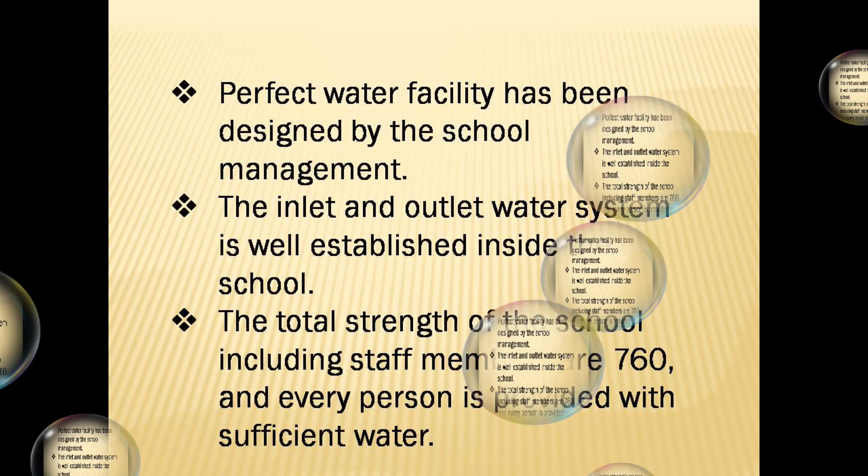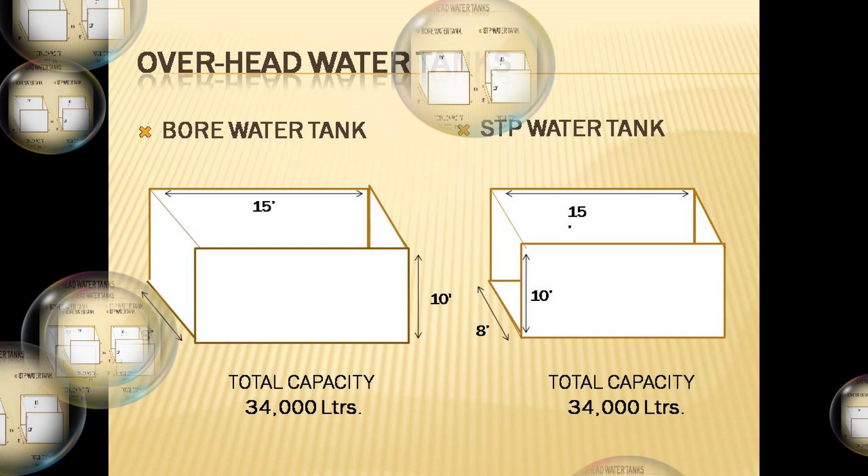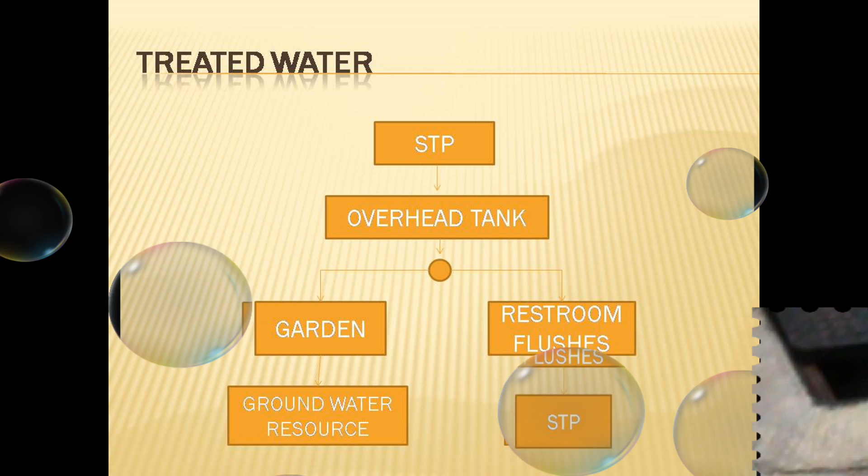We have a well-planned inlet water system in our school. The storage facilities available are a borewell sump that stores 1 lakh liters of water every day. The water is then pumped to the overhead tank. From there, it is distributed to the taps in restrooms and the reverse osmosis plant for drinking purpose. The wastewater from the restrooms is carried to the sewage treatment plant for recycling. The treated water from STP is used in restroom flushes and for watering the garden.

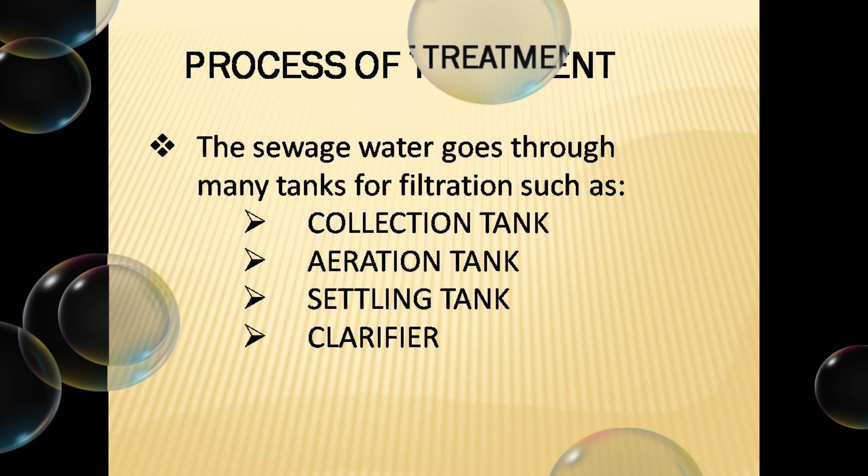Our school VME has an exclusive sewage treatment plant set up to recycle the wastewater. The recycled water is used in the gardens and in the toilets. The water takes about 8 hours to get recycled. The sewage water goes to the collection tank, aeration tank, settling tank and the clarifier. The water used in the school is collected in the collection tank. No filtration process takes place here.

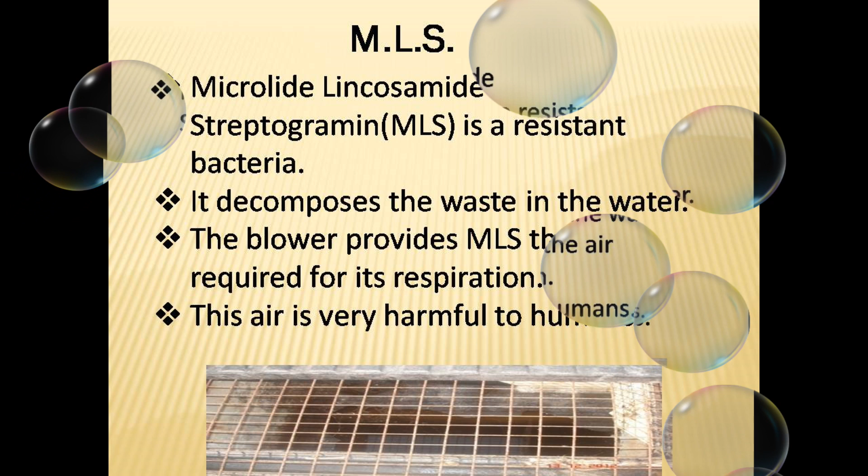This water is then pumped into the aeration tank where urea, diammonium phosphate, and cow dung are mixed together to stimulate the formation of microlide lincosamide streptogramin bacteria, which is a resistant bacteria that helps in the decomposition of waste in the water. The blower in the aeration tank provides the MLS the air required for its respiration. The air is most important for MLS and is very harmful to humans.

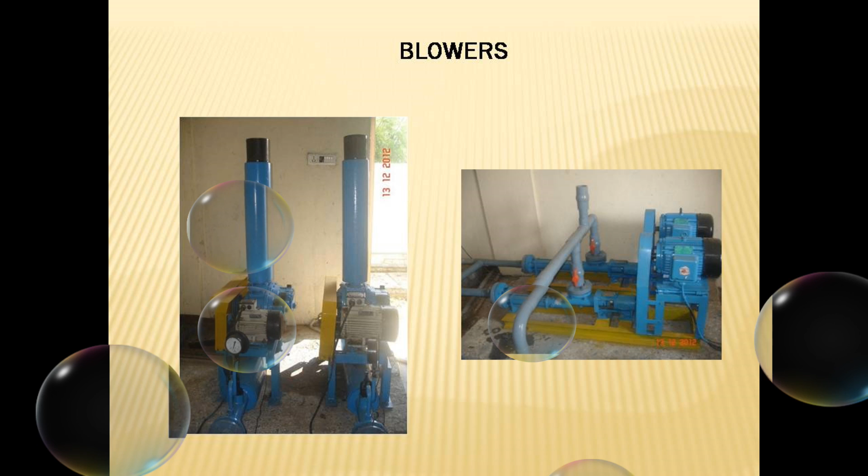Water is now allowed to pass through the settling tank where a fan rotates to remove the waste and it gets collected in the clarifier, which has 2 filters, the active carbon filter and the pressure sand filter. The treated water is sent to the filtration tank where the pH value is tested. It should be 7 to 7.5 or else the process will be repeated again. The solid waste passes through the Pressure Shhamp where it is solidified and is being used as fertilizers.

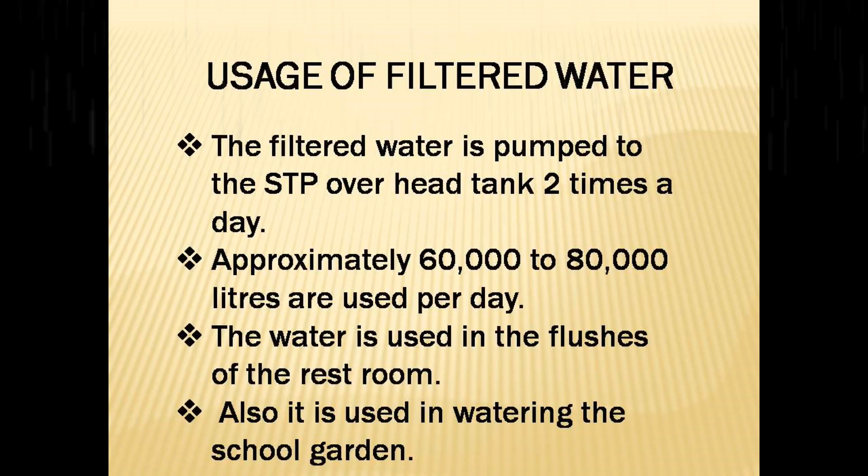The filtered water is pumped from the STP to the overhead tank twice a day. Approximately 60,000 to 80,000 liters are used per day. The water is used in the flushes of restrooms and for watering the school garden. The rainwater harvesting system of our school is designed in such a way that a large portion of our school ground is kept open without cemented floors. This helps in increasing the water table considerably as almost all the rainwater seeps directly into the ground.

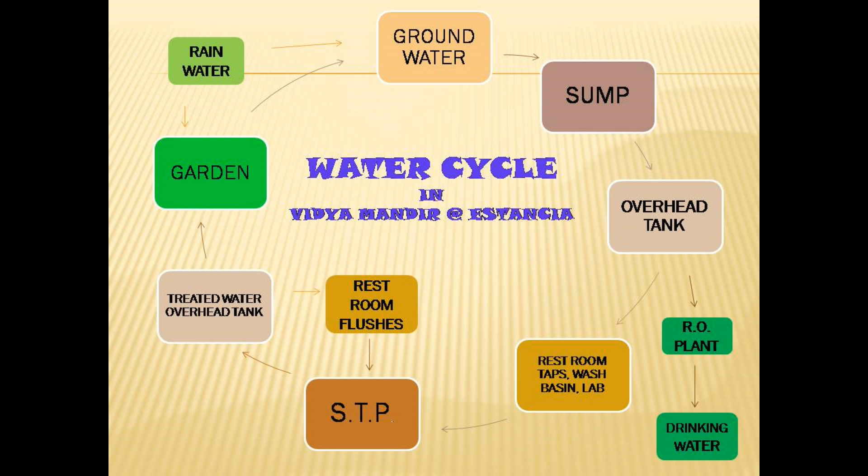To create an awareness about the conservation of water, we, the students of VME, displayed posters and banners on the topic water conservation inside our township for 3 consecutive days. We feel proud to share with you that by working on this project, we learned the importance of water to sustain life. We use and reuse our water resources. We never let it go out of our school.